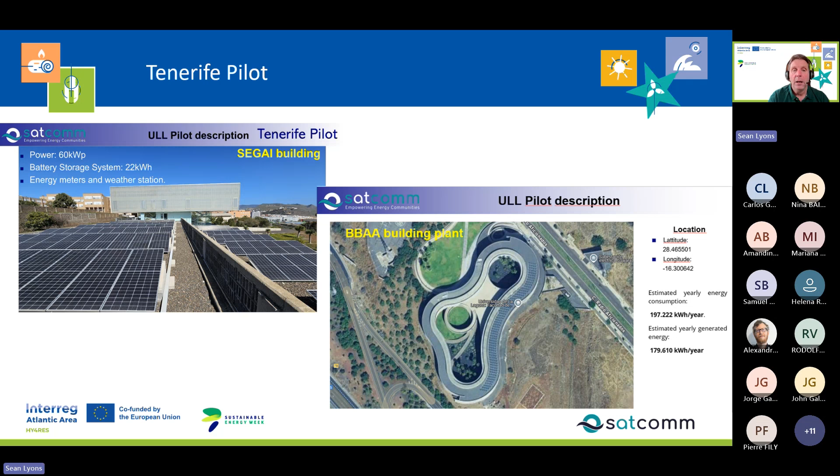In the Portugal pilot, it's in an area called Esquadria, again very much an industrial area where they've got a significant amount of solar and battery systems in their premises, and then they're sharing with a residential community all around them. So again, that's a collective self-consumption project.

In the Irish pilot, I mentioned that all governments and jurisdictions are transposing the laws at different rates. Unfortunately in Ireland it's been much slower than other areas, and energy sharing and collective self-consumption are still not legal in Ireland. But we're working closely with the Irish government, the Irish regulator, the DSOs, and all of the energy stakeholders to look at the mechanisms that are working best in Europe and bring that best practice back to Ireland. There's a number of consultations ongoing, and we're basically modelling the Irish pilot based on what we feel is most likely to happen in Ireland, and also what would bring best practice.

We're modelling that in a site in Dingle, County Kerry, where there's an office block with 9 offices, and we have a number of battery systems and 2 different solar installs around the building. At the moment, those offices, even though they're right beside each other, are not allowed to share. But we're modelling the platform to show best practice and how that office block could become as sustainable as possible.

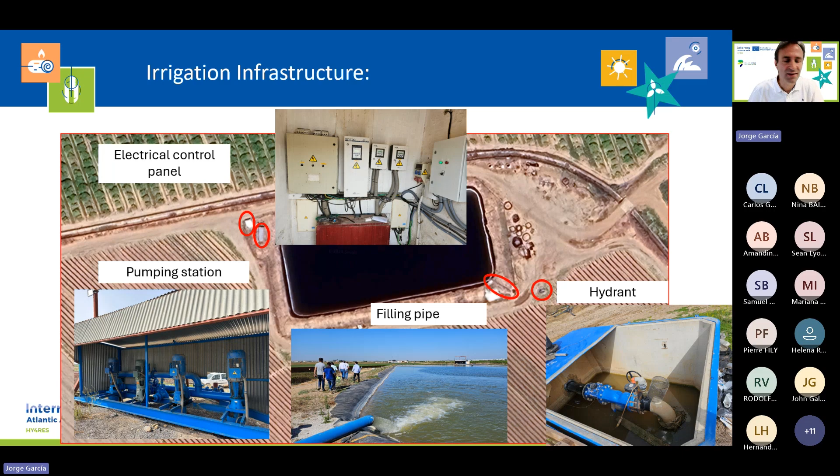Based on these facilities, we have designed an independent renewable energy system. It consists of a 24 kilowatt solar power plant and a pump operating in reverse mode as a turbine with a capacity of around 6 kilowatts. The total installed power amounts to around 30 kilowatts, equivalent to the power of 1 pump.

It is a self-consumption system and does not allow surplus energy to be injected into the conventional electrical grid. The system is independent of the farmer's setup, does not interfere with its normal operation, and can be disconnected at any time. It also has a separate electrical installation and injects the energy generated into the low voltage grid that powers the pumping system.

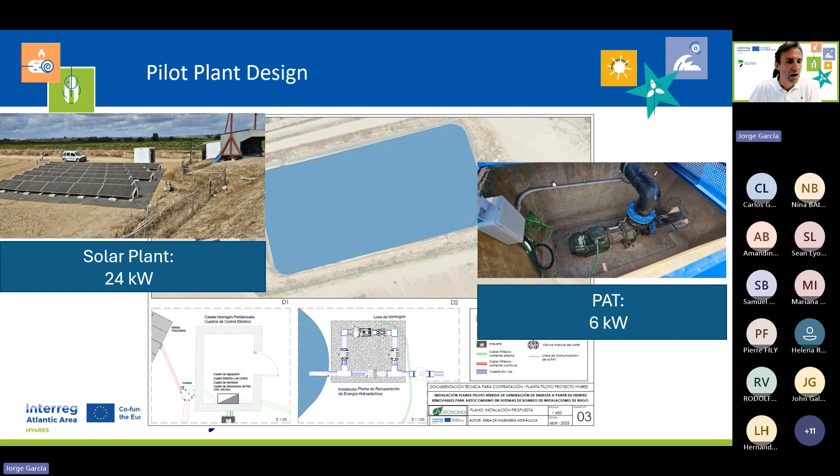You can see the solar plant and also the bypass where the turbine was installed. You can see the Guadalquivir River, some orange crops, and the facilities of the farm and what we did. So that's all. Thanks.

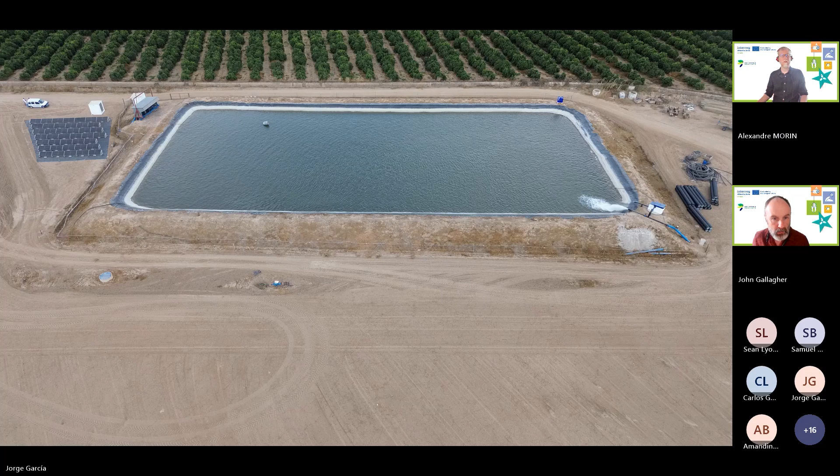Good morning, everyone. My name is John Gallagher, and I'm going to give you an overview of the aquaculture pilot site based in Ireland, in a small fishing town in the northwest of Ireland, in Killybegs in County Donegal.

Just to give a little bit of context, within this project we were interested in focusing on an aquaculture sector. Specifically, we identified a fishing company that had a fish factory in this region of the country, and we worked with them to explore opportunities in hybrid renewable energy.

Just a little bit of context about the fish factory and the company themselves: this is a family-run business that supports local jobs and has always been interested in sustainability, always exploring new opportunities even in their food products, and always looking at value-added opportunities.

The history of the site has been that they've wanted to maximize the opportunities they have around renewable energy. Over the last approximately 20 years, they've installed a 200 kilowatt hydro installation, and in more recent years invested in an 800 kilowatt wind turbine.

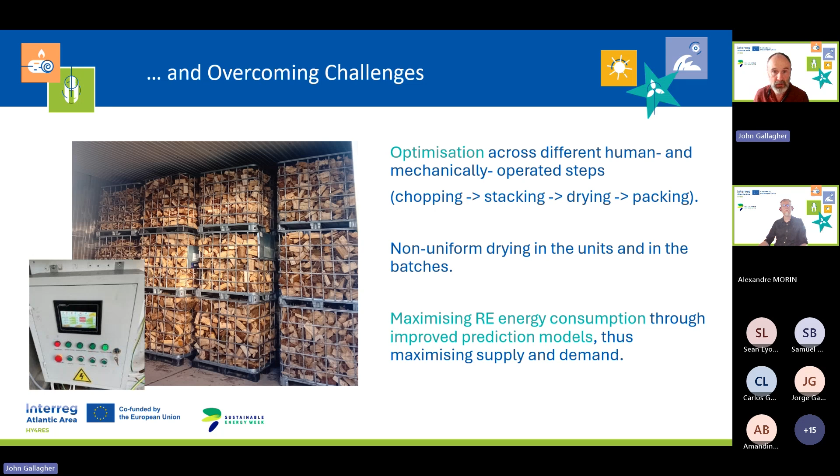Yeah, good morning everyone. Good morning, thank you very much for the invitation.

In this short presentation, I will introduce the HY4RES pilot developed in the port area of Avilés, which focuses on a portable hybrid renewable energy system. The main objective of this pilot is to design, implement, and validate an energy generation system based on the hybridization of different renewable energy sources, with a key feature being portability. The idea is to develop a solution that can be easily deployed in environments such as ports, industrial areas, or even remote locations where energy availability may be limited, variable, or dependent on conventional sources.

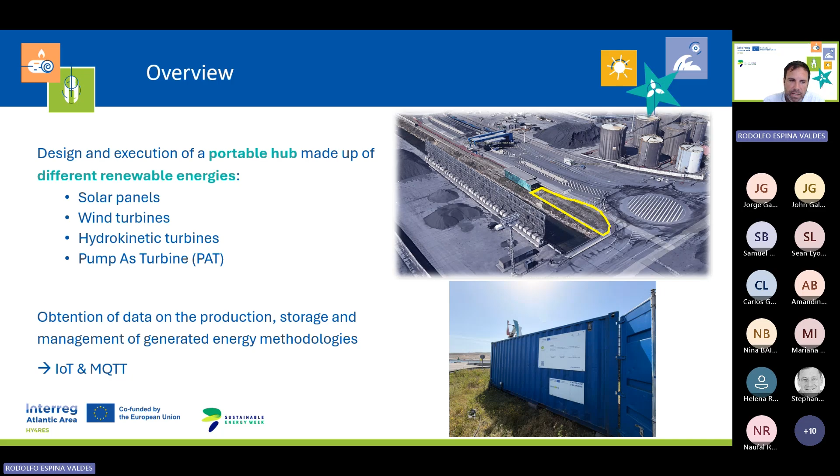In the Avilés pilot, we developed a hybrid energy hub that combines several technologies: solar photovoltaic energy, wind energy, hydrokinetic energy, and a pump as turbine system. All these technologies are integrated into a unified system, and in addition, the project is not only focused on energy generation, but also on monitoring and smart energy management using IoT technologies and communication protocols such as MQTT.

One of the most important aspects of the pilot is its multi-resource approach. The port environment of Avilés is particularly suitable because it provides access to solar radiation, coastal wind conditions, water flows, river and tidal, and hydraulic infrastructure. By combining these resources, we can improve system robustness, reduce intermittency, and increase overall energy availability.

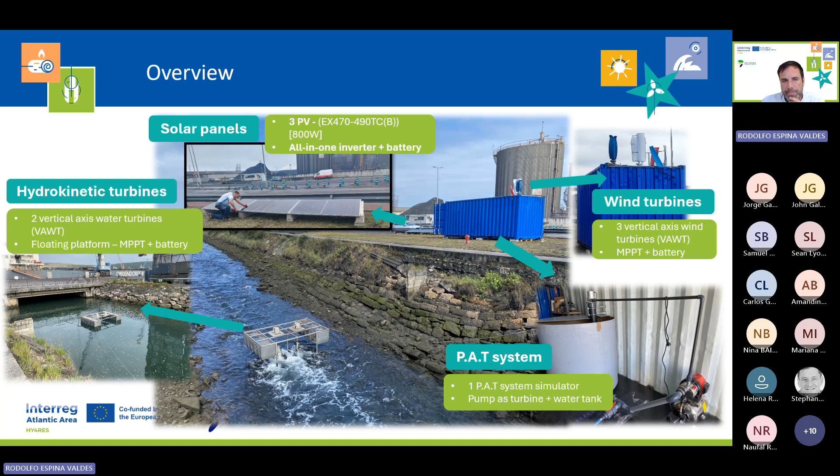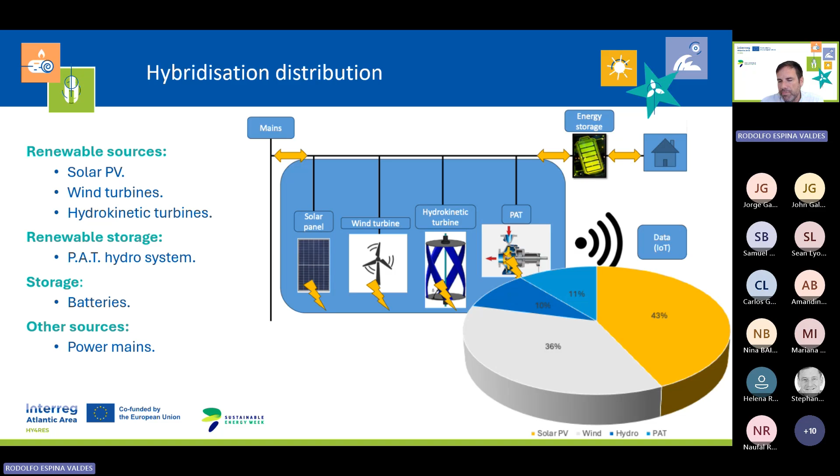Regarding the photovoltaic system, it includes 3 solar panels, with a total power of around 0.81 kilowatts. The estimated production is about 1.55 kilowatt hours per day, or approximately 567 kilowatt hours per year. The system can operate in 2 modes: standalone, using battery storage, or hybrid, connected to the electrical grid. All energy parameters are monitored in real time through the IoT system.

For the wind energy component, we install 3 vertical axis wind turbines. This type of turbine is particularly suitable for port or urban environments because it has better performance under turbulent wind conditions, and it has lower visual and acoustic impact. In terms of performance, we have a total power around 675 watts, and the annual energy production is approximately 473 kilowatt hours. This subsystem also operates in standalone or hybrid mode with full monitoring capabilities.

In the case of hydrokinetic energy, we deployed 2 turbines on a floating platform. This solution allows us to harness water flow without requiring infrastructure. The energy output is obviously more modest, but the total power is about 20 watts, and the annual production is roughly 135 kilowatt hours. However, its value lies in resource diversification and its ability to operate continuously under suitable conditions.

Another innovative component is the pump-as-turbine system. A conventional pump is used in reverse as a turbine, integrated with a water tank, and the system serves both as a generation unit and a form of renewable energy storage. It provides around 200 watts of power and about 140 kilowatt hours per year of energy production.

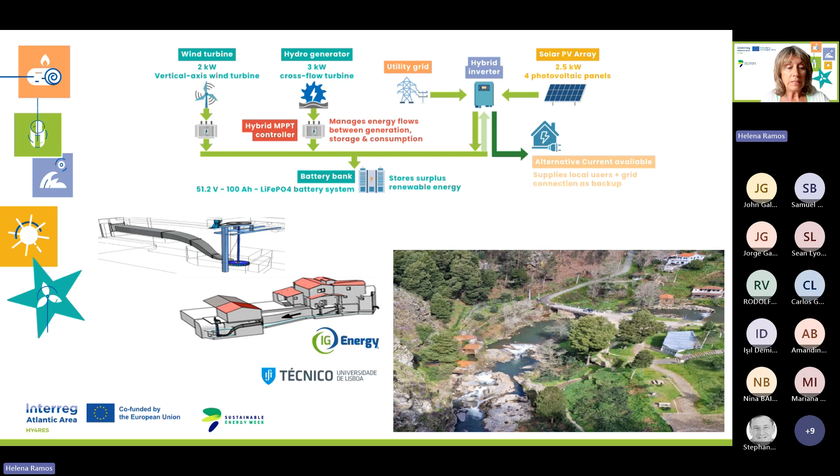In this slide, we can see the hybrid system characteristics, which summarize the pilot's key figures: a combined installed capacity of 7.5 kilowatts total renewables, 29 megawatt hours of annual hydropower energy. Hydropower is the main source of energy production here. A total investment of 54,700 euros, due to the civil works and the innovation applied in this system. Expected payback period less than 6 years. We rehabilitated an old mill, Mill 1, and replaced the damaged Mill 2 with a specifically conceived cross-flow type hydropower turbine suited for this place.

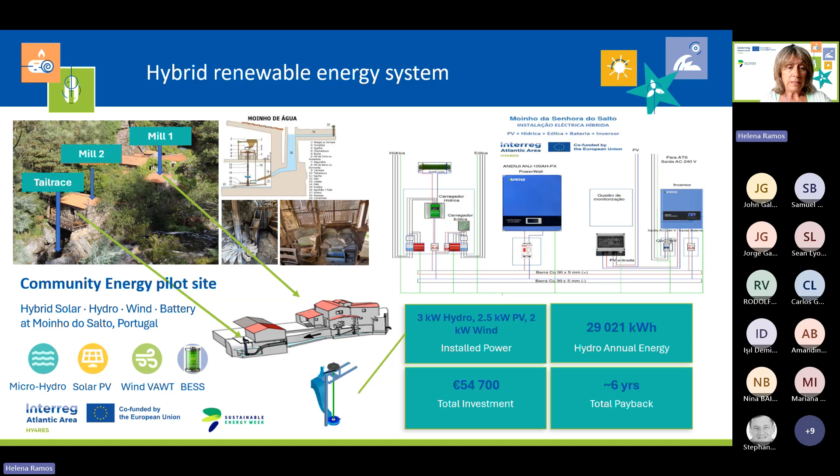In my next slide, I present hybrid renewable system component details of each technology with some videos. The micro hydro uses a cross-flow turbine with these specifications, as you can see: with small rotational speed, you need a multiplier to transform this rotational speed to suit the generator, and with a very low head, lower than 3 meters.

The solar array has 4 panels mounted on the sloped landscape we can see here. The vertical axis wind turbine sits on a balcony viewpoint for better exposure to the wind near the river, and the battery pairs with a hybrid inverter capable of switching between off-grid and grid backup modes.

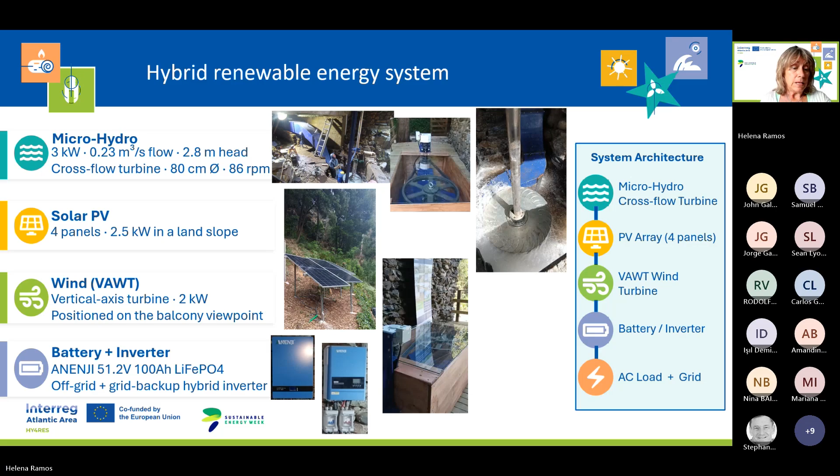Here you can see some achievements with results, which highlights what is being accomplished. The hybrid system has been proven on site with hydro turbine fully operational and real-time output recorded for solar and wind. Here we have an example. During 7 days, the team validated automatic switching between off-grid and grid modes, launched a live monitoring dashboard tracking voltage, current, charge state of the batteries and power, and converted the replaced mill into a micro-historic heritage museum.

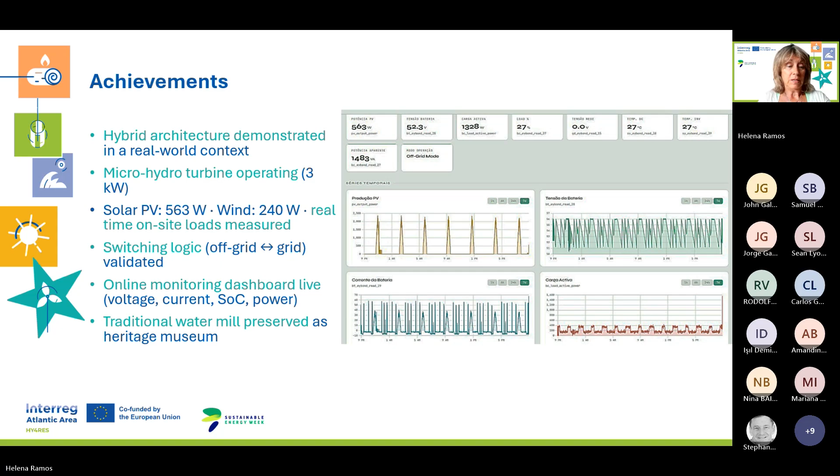And to finalize, I can show the next steps under development, which outlines ongoing work: setting up continuous Internet of Things logging for electrical and battery performance data, using that data to refine how energy is managed across sources, and testing an additional generator type. This is like a lab setup for other improvements that we can use in this installation.